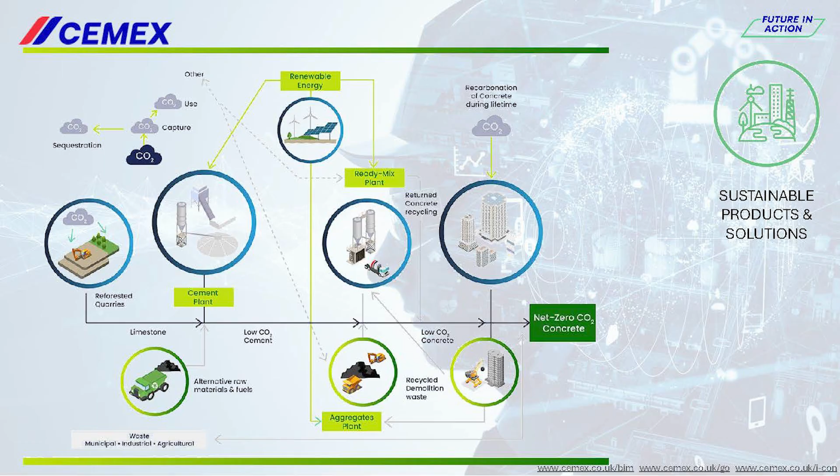So first of all, sustainability, sustainable products. The opportunity for reducing emissions is not limited to the production process, but to the entire life cycle. We use this to contribute to building resilient infrastructure, climate-smart urban development, promoting economic growth, preserving the environment and improving everyone's quality of life. To build a better future, this requires innovating in concrete, specifically, which is my area, and we use the characteristics here for a low-carbon economy.

So we've set a goal of achieving 50% Vertua cement and ready-mix concrete in sales by 2025, and this means we've developed a number of new products. So these are low-carbon cements, which are available across Europe with a reduction of 55% lower CO2 emissions. We have lower carbon concretes, mortar and screed, which could include elements such as graphene. We've got a natural biosource range of admixtures, which we use in those products as well. We have low carbon asphalt and ready block low carbon solutions.

We're using recycled aggregates, recycling into asphalt. We're recycling road, we're using plastics. We're using shredded tyres, crumb rubber into asphalt as well. The Vertua elements in terms of a Vertua solution, these aren't limited to low CO2, but they also include areas of water management. So we have permeable products, permeable asphalt, permeable concrete, and permeable block paving as well.

Recycled aggregate is a large part of the Vertua range. We have thermal conductivity or thermal properties of concretes and other solutions. They form part of the Vertua range too. And along the way we have carbon calculations available on request for all of our cements and concrete products.

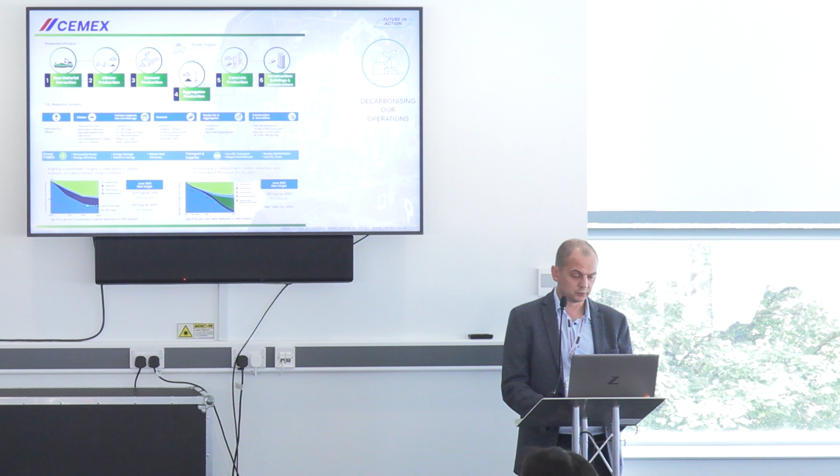Reducing the clinker factor in our cements, so we're looking to blend more, using SCMs. We're optimising thermal efficiency in the kiln, reducing temperatures where possible to get the same product without using as much energy. And we're also using decarbonated raw materials as well to get there.

So when we look at progress, we often look back at 1990 levels. We compare to 1990, which is a time when the industry stood up and realised they needed to make a change to these processes. So as of last year, compared to 1990 levels, the cement production recognised a reduction of 47% in their CO2 emissions, and the ready-mix concrete production was 48% reduction.

With innovation and partnerships, we know that to unlock true carbon neutrality, we need to discover new technologies that can capture and store and utilise carbon, so CCUS. Some of these partnerships that we have include Carbon Clean, and they've developed a breakthrough technology called CycloneCC, which can effectively and cost efficiently capture CO2 from the industrial process. And the goal here is to make it easily usable and easy to set up. So simpler, much quicker and safer to install, and so it can operate in less than 8 weeks.

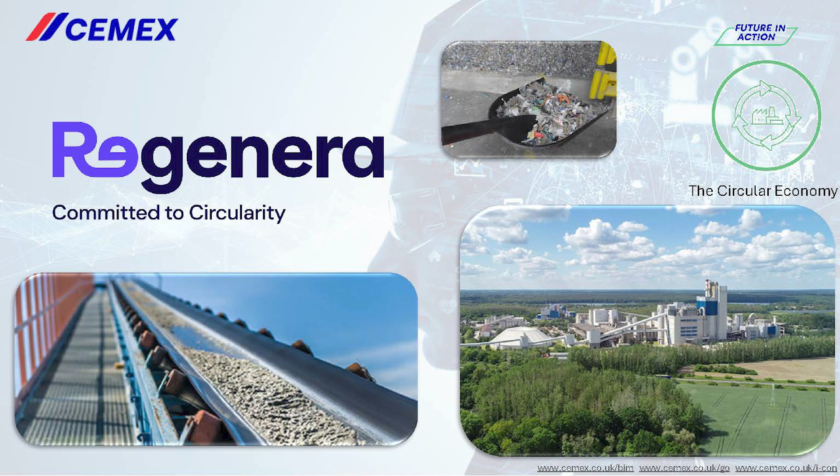For circular economy principles, we've launched Regenera, which is our waste management business, and it looks to manage the waste business and process the waste and then look to reutilisation in our products as well.

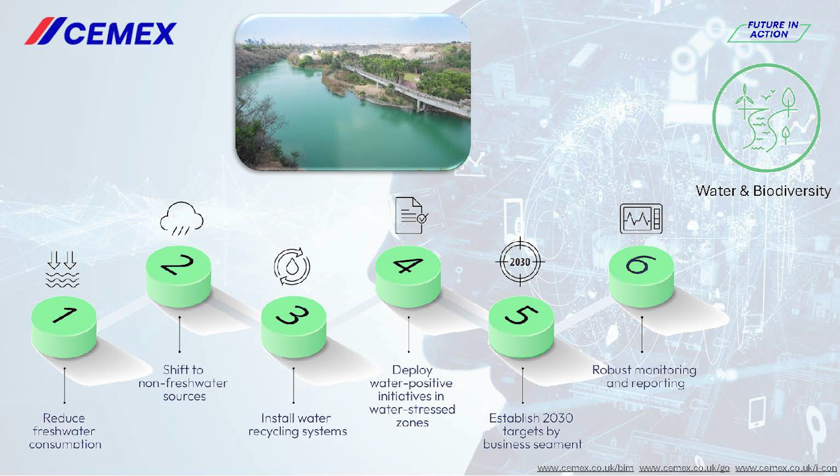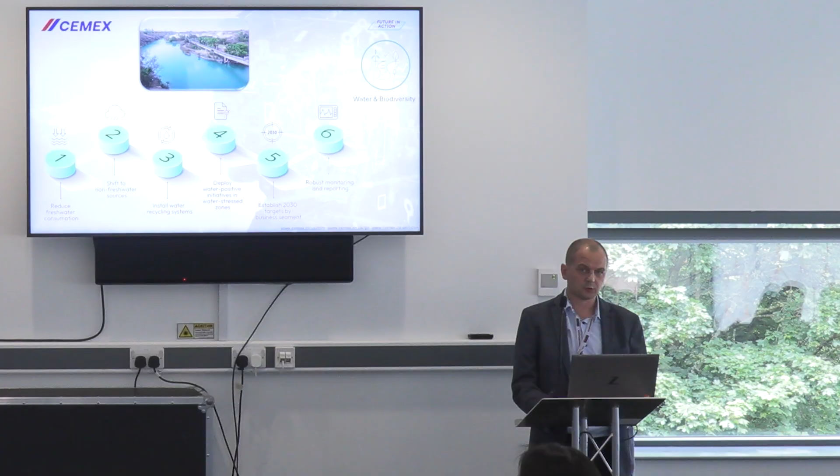And then the sixth pillar is water and biodiversity. So we're dedicated to positively impacting nature by preserving, restoring and enhancing it at every step of the value chain. So we're looking to use either recirculated water or recycled water at our plants. We're enhancing and restoring quarries that are now redundant to us, and they come back as an area of outstanding natural beauty. So those are the 6 pillars.

So now we're going to look at technology in the supply chain. So historically, in the area of concrete, we haven't seen a rapid adoption of new technology. It's probably true of the construction industry, but in recent years that is changing. And there are various ways of presenting the process in realising a project, but if we just look at these 3 macro stages: design, order and tracking, and performance.

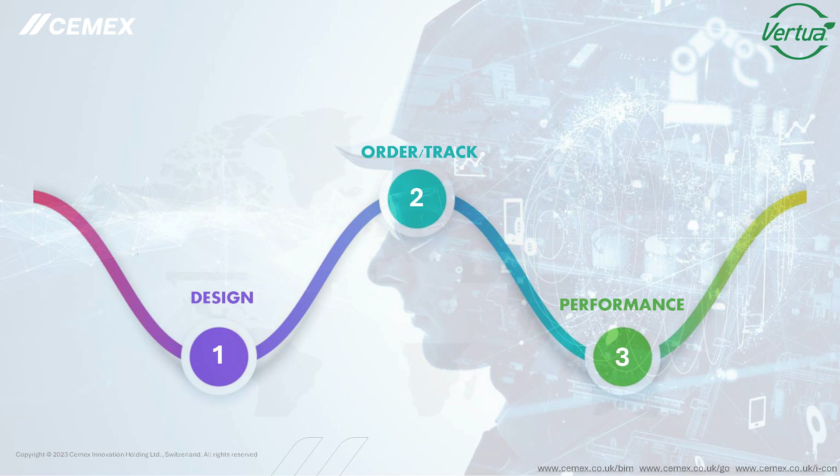So first of all, building information modelling, BIM adoption. NBS published their digital construction report last year, and it showed a development of adoption of BIM, showing that digitally we are using BIM to create projects. So how is this of use to us?

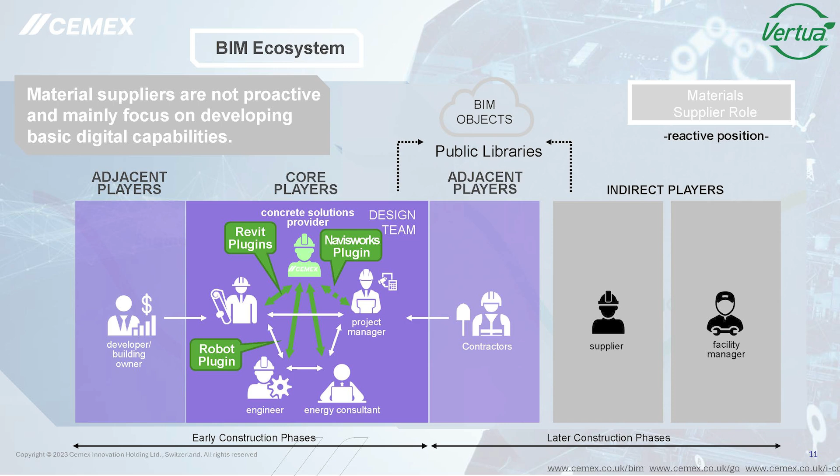Well, it means we're able to get in front of these designers and engineers, the key players in the BIM environment, by creating plugins. So if you can see here, Navisworks, Revit and Robot, we have plugins available that get our innovative materials in front of these designers at the early stage so they can look to get these into their designs. We'll look at Revit.

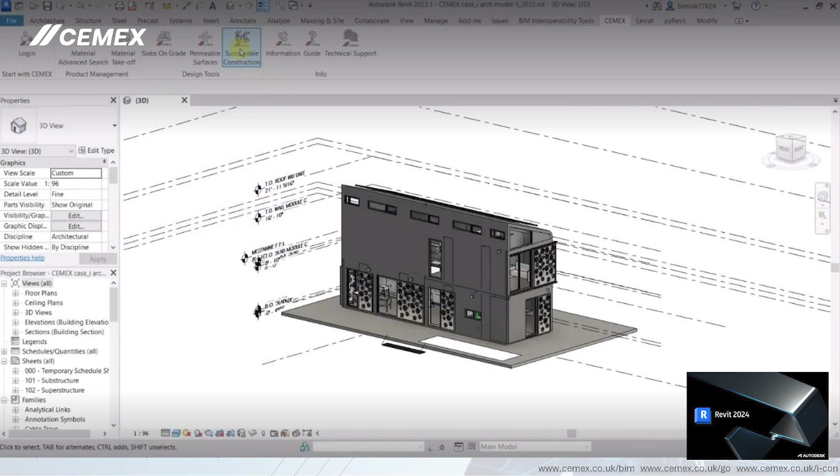This is a Revit model that's been created, and it includes some standard concrete mixes. Revit will include those mixes as standard. They're nothing special, they're just concrete mixes. If we then add a Cemex plugin to this, which is downloadable from our website, you can see on the ribbon here we've got Cemex, and then we've got various tools that can be used to help the designers.

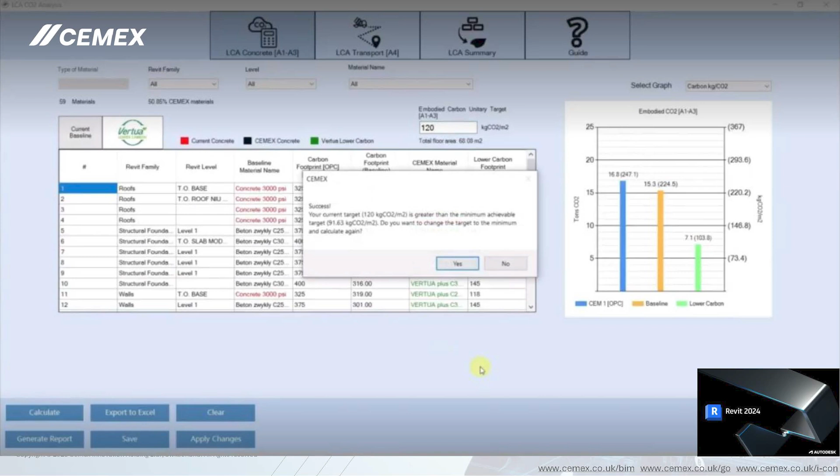If we focus on the sustainable construction tool, if you click on this tool, this will give us alternative products, and it will maintain the requirements such as compressive strength, which is obviously important for the project, but it will give some solutions that will give lower CO2. So if you look at the graph on the right, we've got the blue bar, which is CEM 1, which again is the 1990 level. No one's ever going to build in purely CEM 1 concrete.

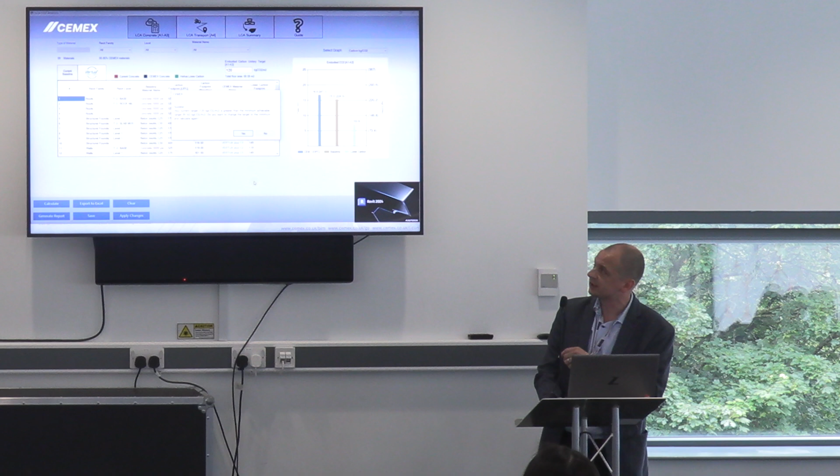The baseline is those standard mixes that are supplied by Revit, and then the green line is those that have been loaded up from our plugin that show you the achievement that you can get with lower CO2 options through Cemex. Once you're happy with that, you can apply the changes. Again, there's options to select or deselect whichever mixes you see fit on the left-hand side.

And what will happen now is we've got the original design that's been developed with the standard materials from the Revit library, but now they include the lower carbon concretes with comparable performance to the standard and with a reportable CO2 reduction. So these options are not available as standard in Revit, they do need to be downloaded from the plugin.

At the second stage, we've got order tracking. Now Cemex Go is the construction industry's first end-to-end digital platform to help you work faster and smarter. So you can see the status of your jobs, place orders and track them, access your records and pay invoices and more. It's a really positive indication that digital adoption is not solely at the early stages of the construction phase, but also being embraced more towards site level.

And we have an 85% adoption of Cemex Go. From that information we have, it appears that the interest in smart sensor technology is increasing. So once we get to site, we're interested in the performance of concrete. There's some market analysis out there that reports an expected continued increase in growth of this up until 2030. And our illustration here shows inquiries coming into us at Cemex. We had a little blip in that COVID year, but after that there was a sharp rise in the interest of smart sensor technology.

And this led to the creation of our Cemex i-Con business, which is a full package solution offering ready-mix concrete, smart sensors, and the calibration by the lab experts team as well. A little graphic there of what the sensors look like.

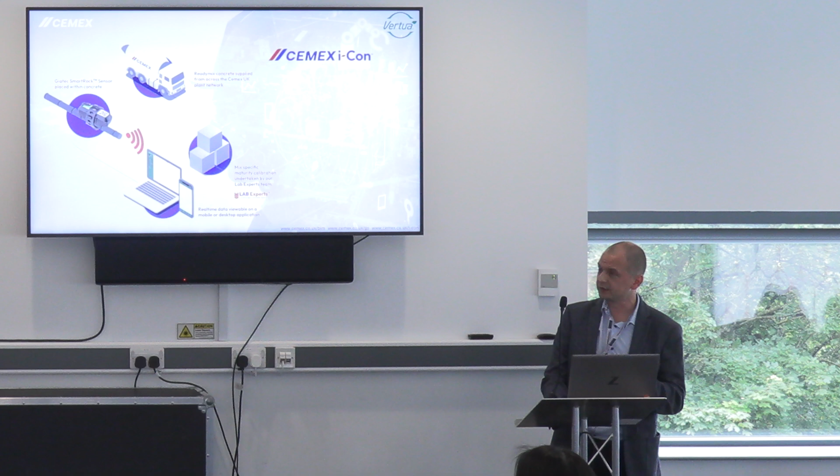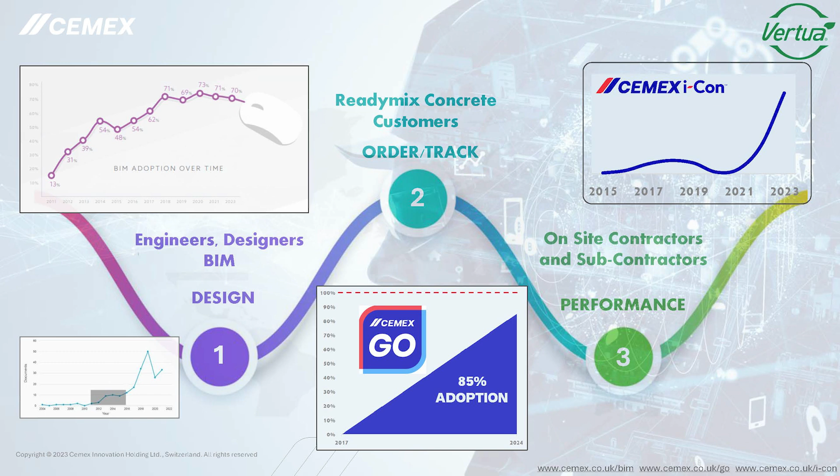So this is just one way of illustrating the construction phases, and it's a big oversimplification of the process. But from a macro perspective, it shows that with the tools available, it's an exciting time with a clear uplift in the adoption of digital tools for unlocking efficiency.

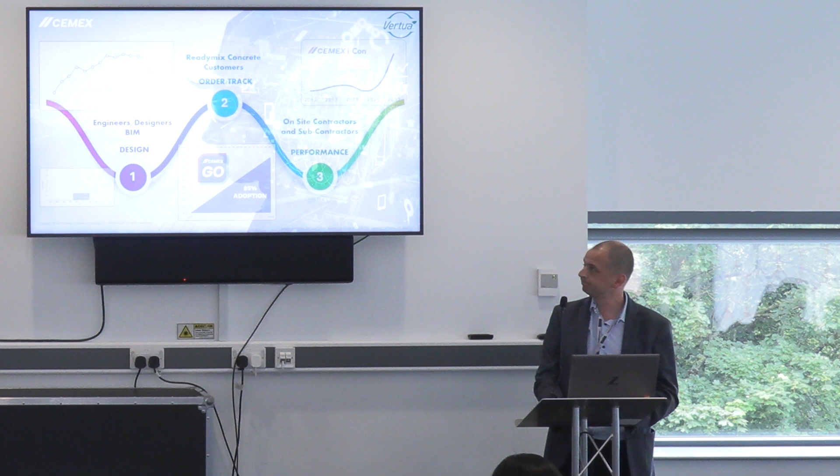Simon Byers from Vantage Data Centers. Have you fed any graphene modelling into your i-Con mix digital platform? Not yet. It's certainly possible, obviously, and we've been working with graphene in concrete. So far, results from that have been from cubes only, so we haven't used the sensors in that concrete yet, and trials are ongoing.

Okay, so you're doing trials on slabs? Yeah, trials on slabs. There's a slab here, I believe, out the front that was supplied with graphene in. There is. 15 metres just outside this window. And there's more trials ongoing, which again the smart sensors could be used in to track that maturity.

Craig Wilson from Concrete. Assuming supplementary cementitious materials generally based on GGBS and PFA, what should... Well, we wouldn't want to pigeonhole GGBS, PFA, certainly not PFA because it seems relatively non-existent, but also there's others such as limestone fines as a replacement. So we use CEM II/A-L a lot.